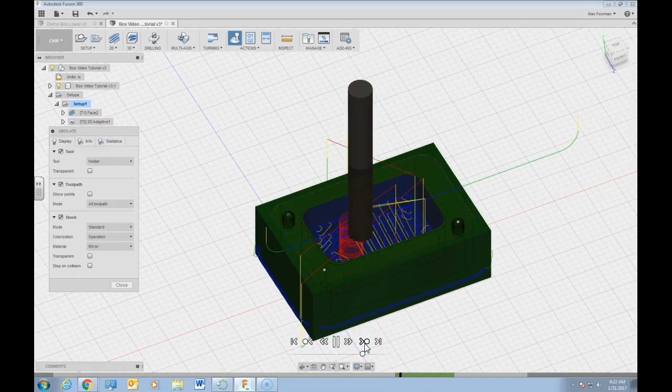I can simulate again this whole thing, make sure that it looks good to me. Bounce around to here. Okay, that's finishing out the inside. Now we're finishing the outside. That went to full depth. Sure, why not, it's doing the floor there. And now it's coming in up against the wall in there. Hey, that looks good to me.

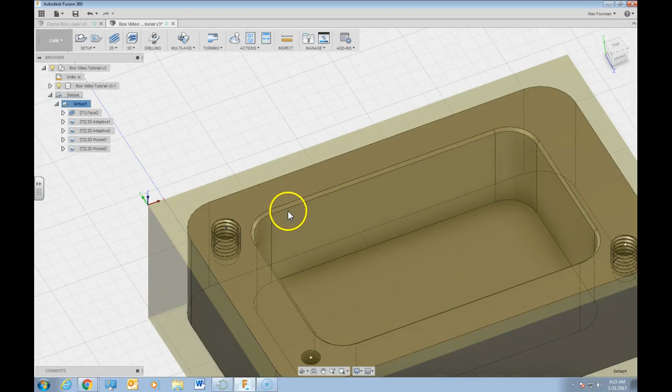Okay, now here we go. We had cleared that out around the outside here. Now we're going to want to come in and finish this chamfer in here. So here goes with this. If you hadn't actually modeled this in yet, that's still okay here. It's going to be slightly different than doing this.

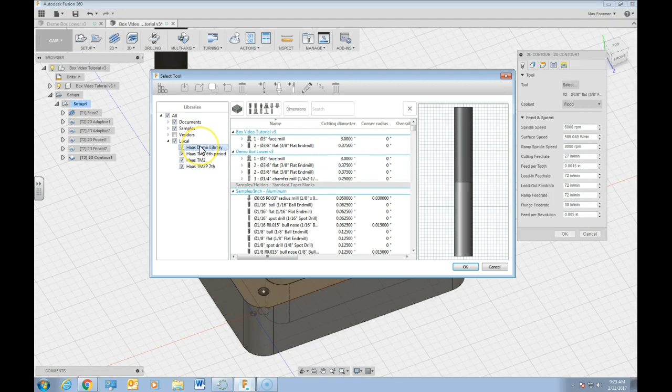But what I'm going to want to do is a 2D contour. Now the tool is going to be different than what we used before, the flat 3/8 end mill. I'm going to come back into my demo library here. Now it's giving us a lot of other options with this contouring. We're going to want to select this 1/4 inch chamfer mill. Click OK. All right, 1/4 inch chamfer mill.

So we're going to notice here that this tool actually has a triangular profile. That creates a chamfer, it's considered a form tool. All right, so 5,000 RPM spindle speed. We could actually change that up to 6,000 if we want, it's not going to harm anything.

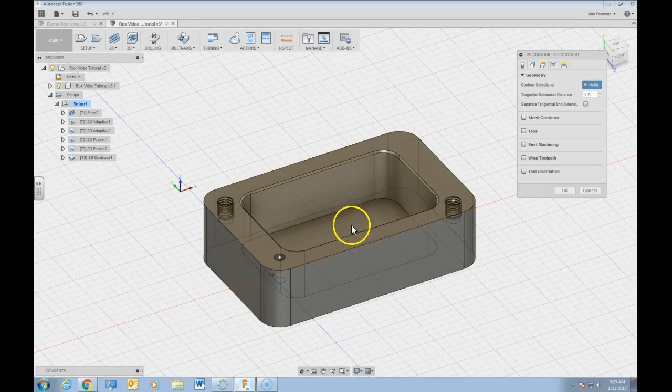And then geometry here, so here's going to be the critical thing. We don't want to select this upper contour edge. It's actually going to be this bottom contour right here. So select that for our geometry.

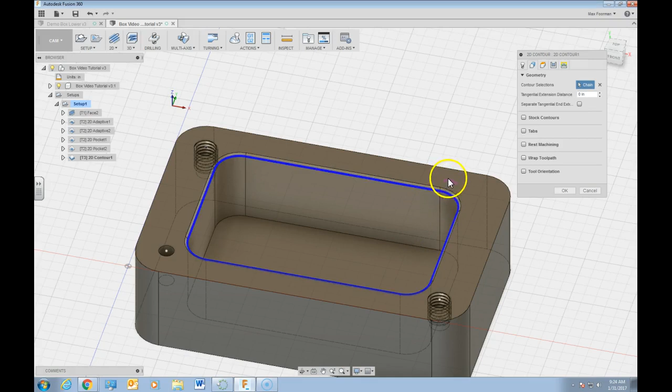If you didn't do this correctly, notice that we have this red arrow selection here. If I didn't mention this in previous videos, but if you'd seen this in previous videos, if you click on this, you can actually change the side of the cut to the opposite side of that contour. That right there is actually not what we want. Where it defaulted to is correct.

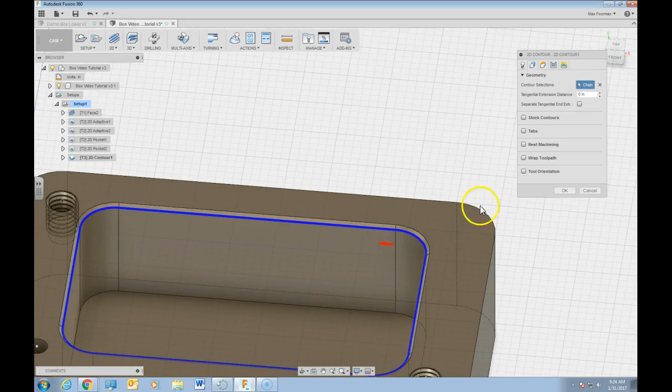You can imagine here, what it's telling the computer to do is try and calculate this toolpath with the cutter to the opposite side of this contour, which would actually come in and gouge along and not give us what we want. So here we want it, the tool is going to be to the inside to where this pocket is. It's going that way around, left of the part, which is called climb milling.

Get to that in some other video at some point. But now what I've jumped over here to is heights here. So since we actually already modeled in our chamfer, that bottom height is just fine.

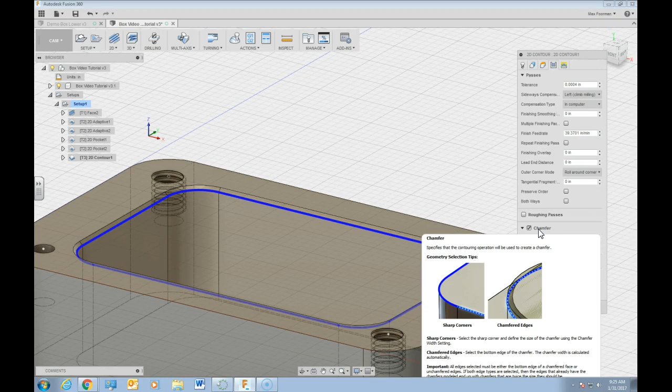Passes here though, you can see now that it has actually selected chamfering operation. So it says sharp corners, select the sharp corner and define the size of the chamfer. Chamfered edges, select the bottom edge of the chamfer. So I'm doing what it's told me to do. Select the bottom edge of the chamfer, width is calculated automatically. Fantastic, so that's the benefit of actually modeling your chamfers in on the parts if you want.

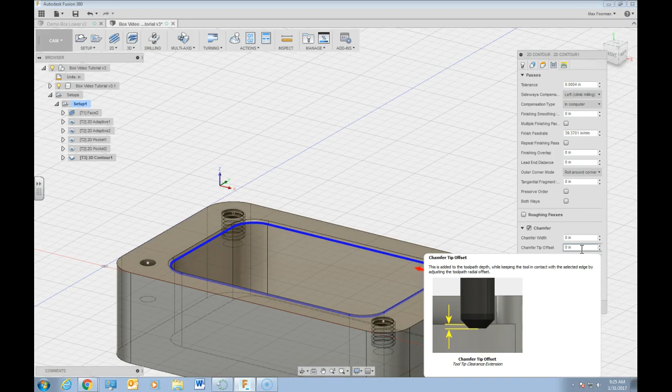But contours and chamfering is kind of the only thing where you could actually get a feature onto your part that isn't actually modeled, and we can show that maybe at a later date. But so I don't need to change anything here. But the only other thing I might recommend doing is the chamfer tip offset. It's actually added to the toolpath depth while keeping the tool in contact with the selected edge by adjusting the toolpath radial offset. So this might be a good idea to alter slightly here, just to make sure that the tool isn't full up against the edge.

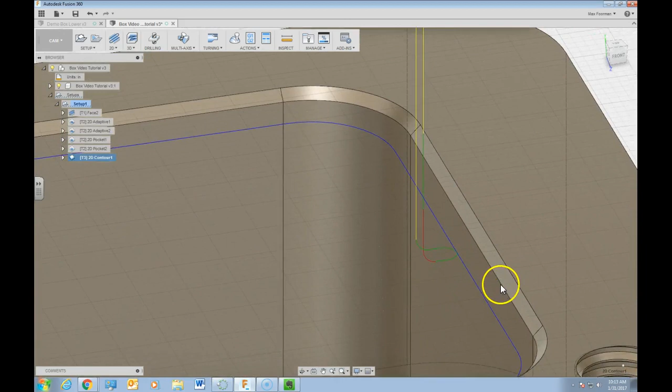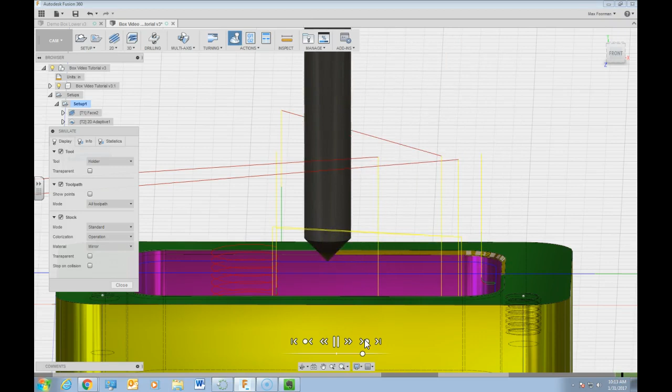Click OK. So this toolpath generated, we have the chamfer mill walking around the contour, and here you can see because of that offset, it's actually moved this inward slightly. If we were to simulate right now, step through all these operations. It's coming around the outside. There we go, we are chamfering around and removing the material from there.

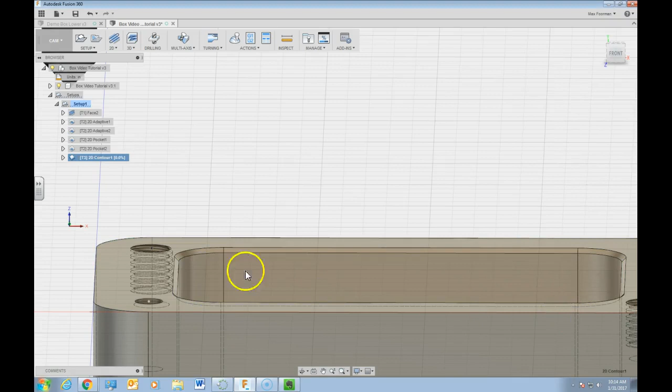Again, with that in mind, if we close that out, if we come back in and edit this, let's see how this makes the change here. If we were to change that back to a 0 right now, it's showing that the actual center point of this tool is coming down right here. That may cause some gouges, so that's why I'm recommending that we come back in here.

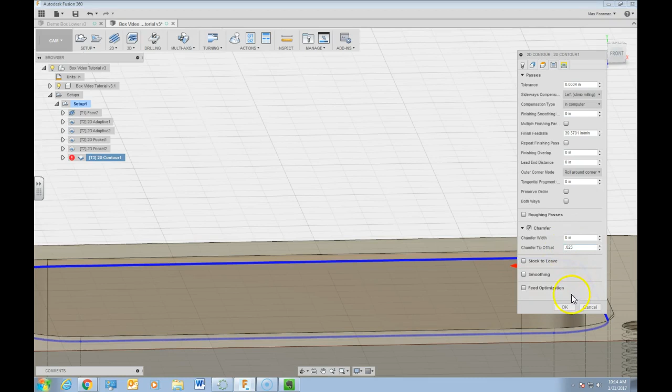So keep that line imagined there. If you set the chamfer tip offset here by just a couple, 25 thousandths or something, it's going to make it so that it has to come over and down a little bit. So if there's some slight mismatch—again, you need to have some experience to see how this is going to make a difference, but that's recommended there.

So we're actually going to be cutting more up in there, more along that face of the tool, as opposed to right on the tip right there. So that is creating the chamfer all the way around.

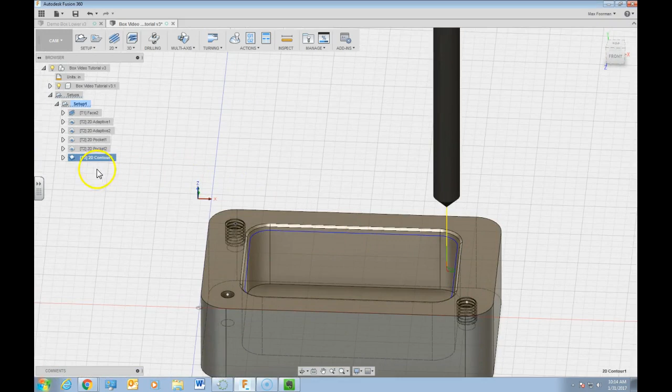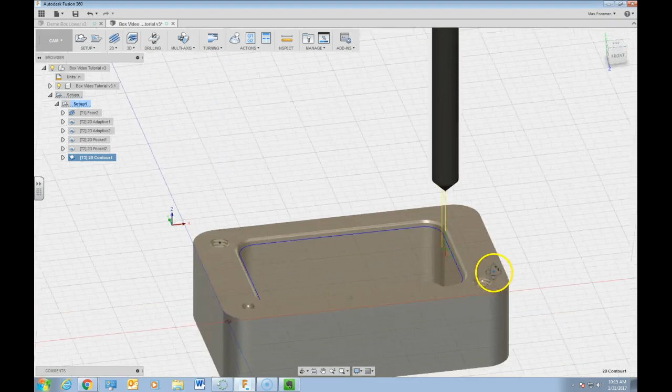It's pretty cool. The other thing too on this one, for quality's sake, when we do passes here—single, we've got that there, multiple finishing passes. I've got it set to finishing overlap of 0. Again, you may want to change that to actually be a slightly larger value. So if you can recall what it looked like before, the entry and the exit occurred at the same point, but now it's actually entering from this side right here, coming around, and then actually traveling beyond that point and then coming out back here, which can give you a better surface finish on the actual part.